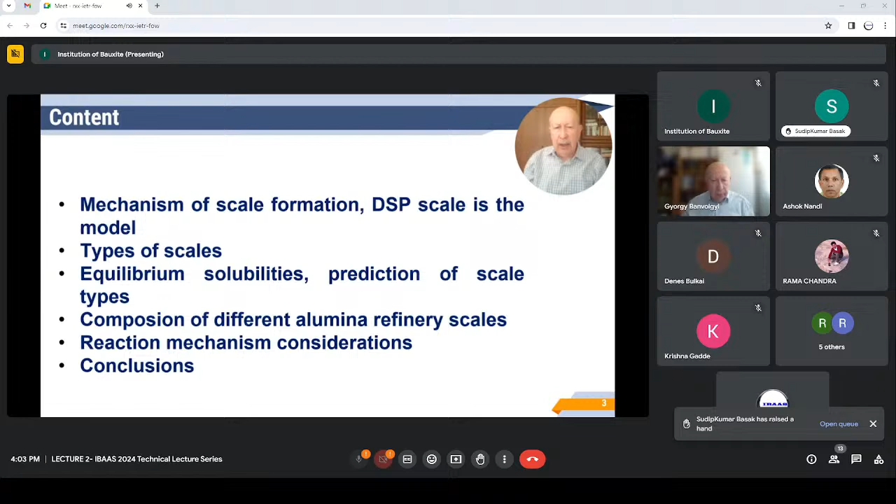As you know, liquids and slurries are processed in the alumina refineries. The liquid phases have complex compositions, so have most of the solid phases, such as bauxites and bauxite residues. The temperatures and solid contents are other characteristics that vary at different places of the Bayer process. The abrasive effects and scalings cause most of the headaches for the operators. The objective of this presentation is to provide an insight to the formation mechanism of various scales of alumina refineries.

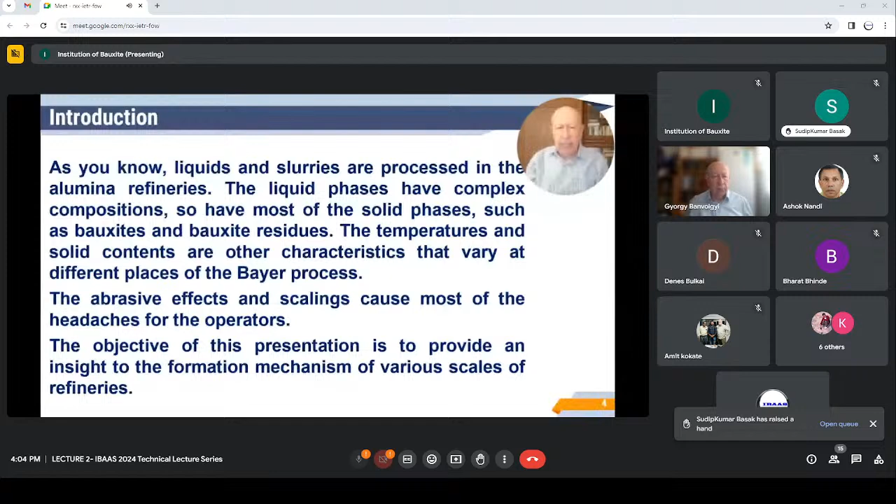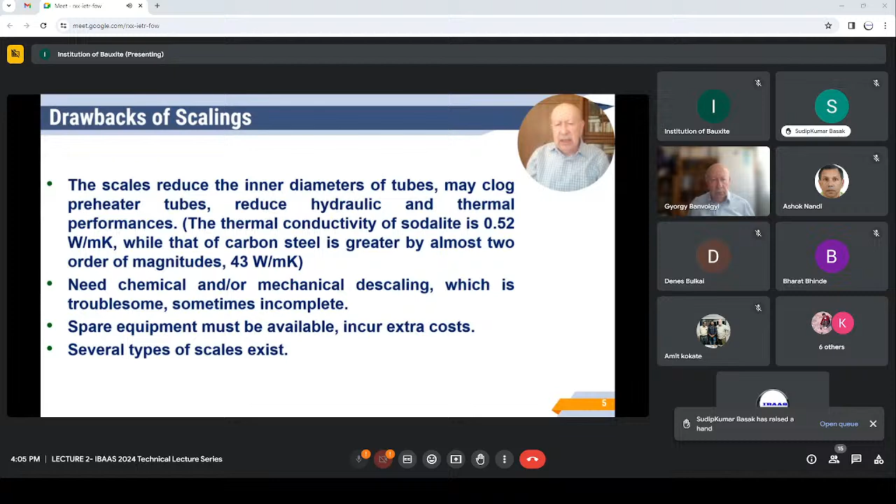The scalings have several drawbacks. The scales reduce the inner diameters of heat exchanger tubes or other tubes, may clog preheater tubes, reduce hydraulic and thermal performances. The thermal conductivity of sodalite is 0.5 watt per meter Kelvin. However, that of carbon steel is greater by almost 2 orders of magnitude. The scales need chemical and/or mechanical descaling, which is troublesome, sometimes incomplete. Spare equipment must be available and they incur extra costs. You will see that several types of scales exist.

Here is a schematic which shows the formation of DSP scale as a model. This is the tube wall. The other part of this tube is actually scale, and here is the thin boundary layer. The saturation temperature of the steam is represented here.

Throughout the tube the temperature decreases, and decreases to a much greater extent through the scale, and there is a difference of the temperature between the boundary layer and the bulk of the fluid. The velocity of the fluid is actually zero at the wall, therefore the residence time of the material is practically infinite. The concentration of silica is at equilibrium by definition at the wall, and in the bulk of the liquid it is significantly higher.

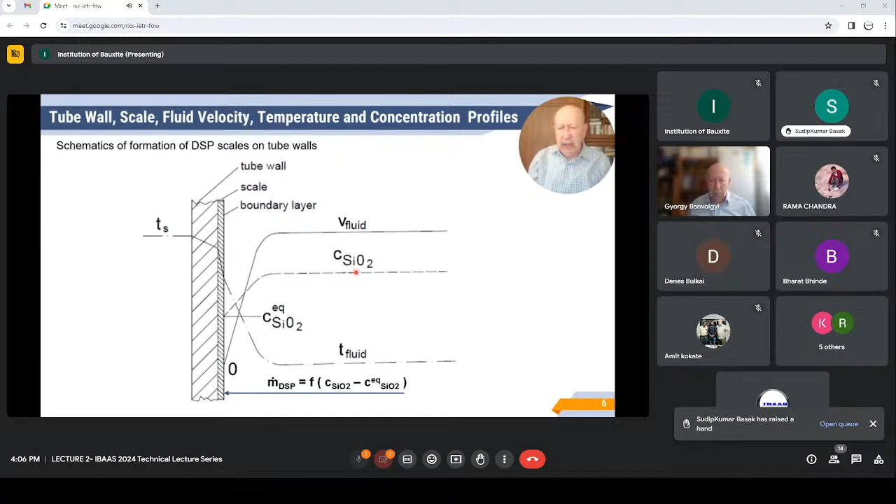The chemical reactions in general can be described if the equilibrium concentrations of the reagents and products, reaction equations, stoichiometry, reaction kinetics, reaction mechanism, and possible transformation of one modification to another one are known. Let us start with reactions of soluble alumina and reactive silica minerals.

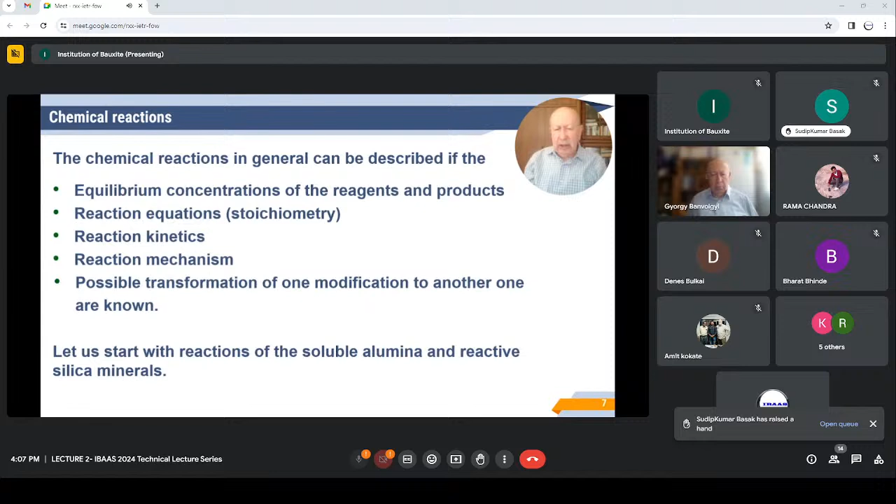Here is the picture of the equilibrium solubilities taken from Jan Kotte paper back to 1981. These lines represent the gibbsite equilibrium solubility at various caustic concentrations. These lines describe the boehmite solubility, and there is some information about the diaspore solubility, all in the function of the temperature.

And here is a Bayer cycle of a low temperature digestion refinery. Actually, it is Bauxilum in Venezuela, South America. And let me emphasize that at this point, the liquid phase is able to dissolve some alumina. However, the liquid phase is supersaturated for boehmite.

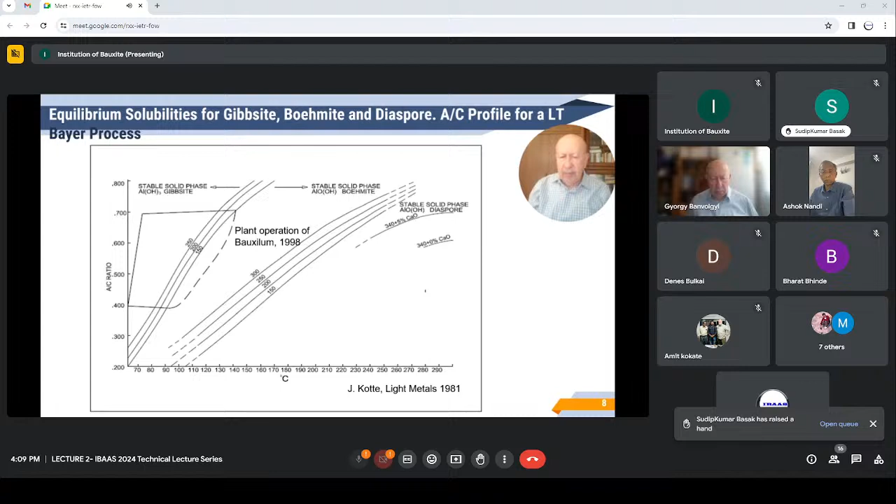This graph is taken also from Jan Kotte, and you can see that the overall reaction rate starts at about 100 degrees centigrade, a little bit at higher temperature. Kaolinite, boehmite starts dissolving at about 160, 180 degrees centigrade, and diaspore somewhere higher than 230 degrees centigrade. And you can see that at a certain point the overall reaction rate slows down and diffusion conditions are met.

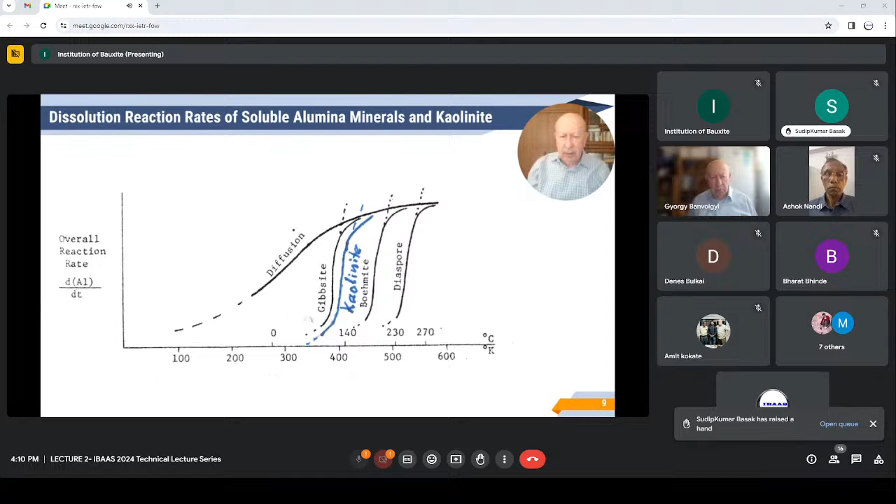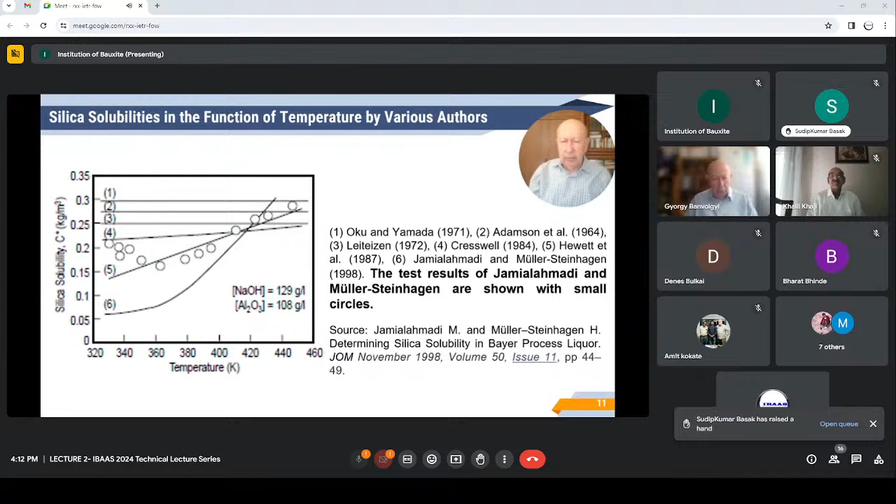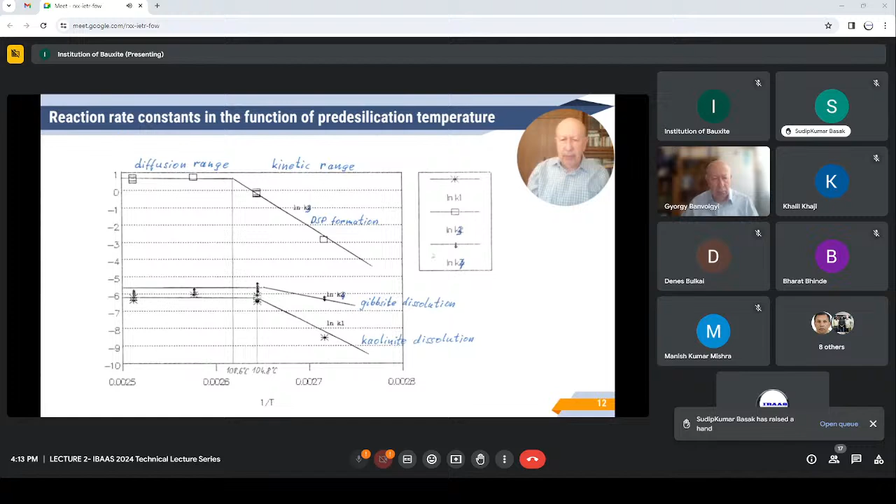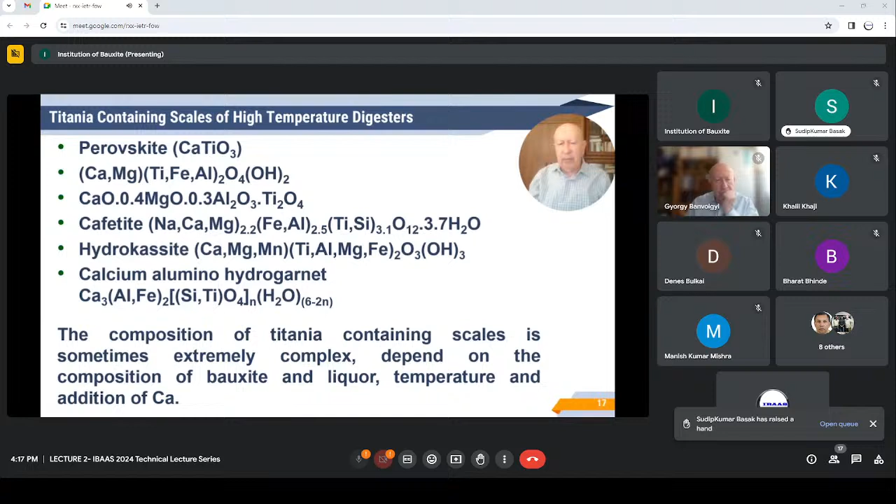Let me go further to the process technology, the feedstocks and scales of some alumina refineries. The investigation of the scales goes back to 1971 when the scales from the Almásfüzitő alumina plant were investigated thoroughly. The bauxite was boehmitic bauxite, however, a fairly large amount of available alumina was in gibbsite, and some were found in goethite. About 40% of the iron oxide was in goethite, the rest in hematite.

Some predesilication was carried out for 6 hours at 90 degrees centigrade. The digestion was so-called single stream digestion. The digester lines consisted of 5 vertical shell and tube heat exchangers heated with flash vapor, 2 autoclaves heated also with flash vapor, and 5 autoclaves heated with live steam, and they provided the retention time of about 1 hour at 225 degrees centigrade.

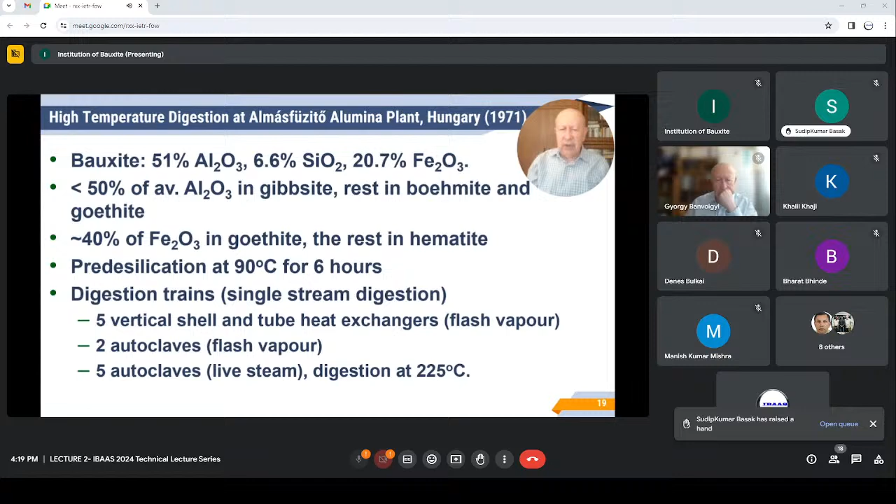Here is the chemical composition of the digester scales. You can see that there was a significant change in the composition of the silica content at about 145 degrees centigrade. The silica almost diminished, and the amount of iron became dominant.

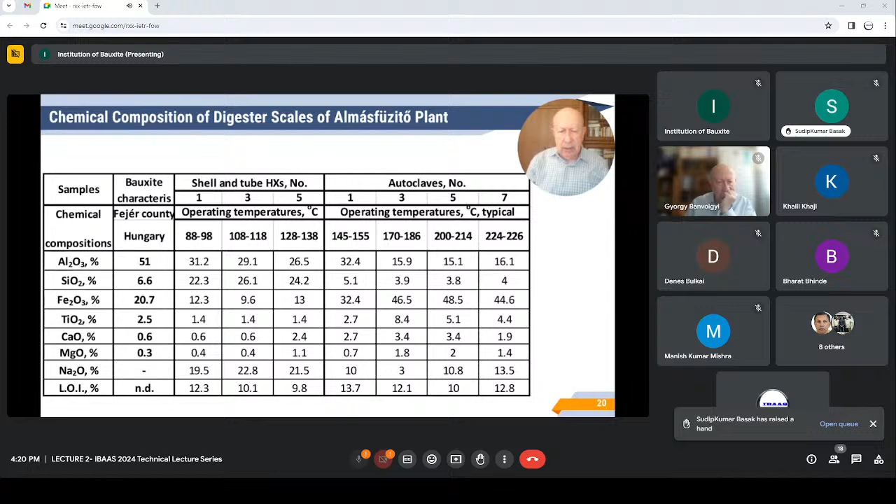The next slide shows the mineralogical composition. I am sorry that this table is populated so much. The sodalite and to a lesser extent cancrinite comprise the main constituents of scales in the preheaters at temperatures up to 140 degrees centigrade. At temperatures higher than about 160 degrees centigrade, cancrinite becomes dominant over sodalite.

The sum of sodalite and cancrinite significantly decreases in the autoclaves operating at 150 degrees centigrade and higher, since the transformation of reactive silica finished. In the autoclaves at temperature of 145-166, boehmite deposits can be found due to the local supersaturation of sodium aluminate for boehmite. At higher temperatures, the liquor becomes unsaturated and dissolves boehmite.

The goethite to hematite transformation starts at about 160 degrees centigrade. The hematite becomes the principal iron constituent of the scale, while goethite content gradually diminishes. The hematite-goethite ratios dramatically increase at temperatures higher than about 180 degrees centigrade. These observations support that the conversion of goethite to hematite takes place via liquid phase.

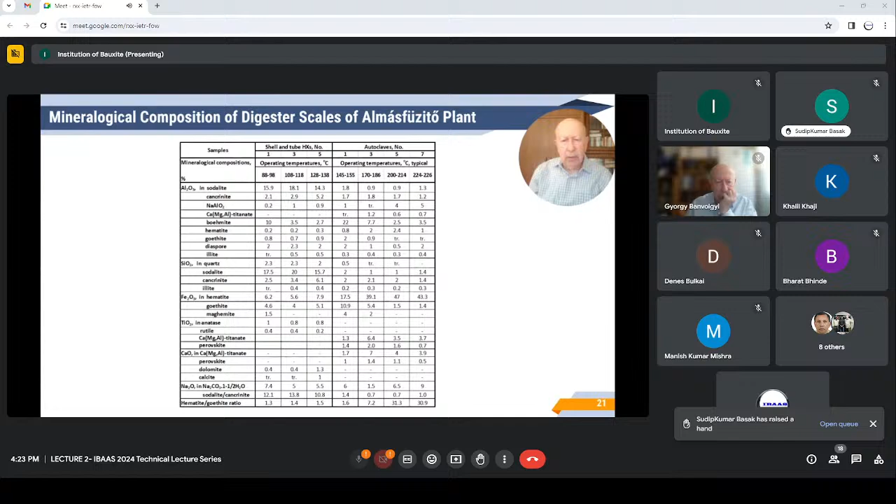The next refinery is the Magyaróvár Alumina plant, Motim, also in Hungary. The bauxite composition is presented on the following sheets. Tube digester comprised the digestion equipment in this plant. This was operated with single stream digestion. 15 horizontal tubular preheater units heated with flash vapor and live steam condensate, then 4 also horizontal tubular preheater units heated with live steam, and another tube for the retention time for about 10 minutes.

And after the 6th preheater unit, 2 vessels were installed to provide 12 minutes retention time at about 145 degrees centigrade, and after the 9th preheater unit, 1 vessel for 6 minutes additional desilication at 180 degrees centigrade. The digestion temperature was 240-250 degrees centigrade.

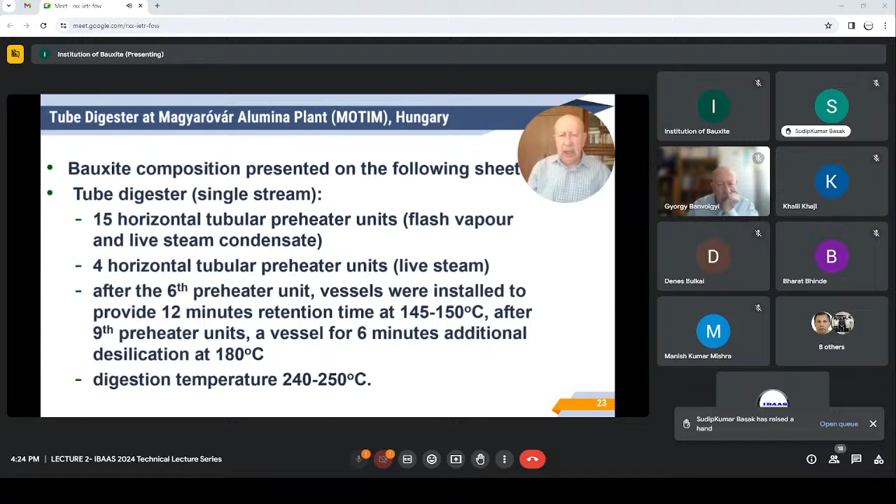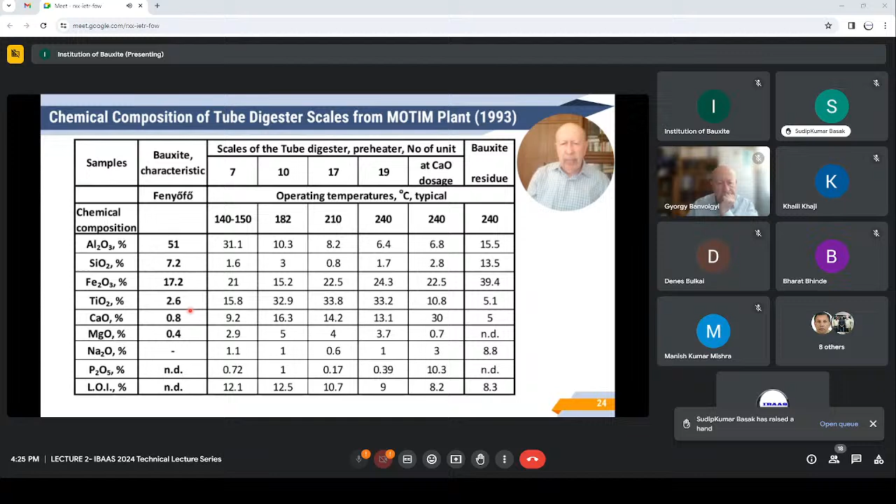Here are the chemical composition. You can see that the titania and calcium containing minerals are characteristic for the scales. The bauxite was a typical high silica bauxite in Hungary. I'm sorry that this table is populated.

Also, sodalite and to a lesser extent cancrinite comprise the main constituents in the tubular slurry heat exchangers at operating temperatures up to about 150 degrees centigrade from previous experience. The vessels, which provided retention time of about 12 minutes at about 145 degrees, significantly reduced the sodalite cancrinite scale in the preheaters operating at higher temperatures to a fraction. A temporary boehmite supersaturation caused boehmite deposition at the temperature of about 145 degrees centigrade.

The calcium-magnesium alumina titanate compound has been found in the largest amount in scales formed at temperatures higher than 164 degrees centigrade. The amount of hematite is significant at 140-150 degrees centigrade and higher temperatures. The goethite is negligible. The hematite-goethite ratio is about 10 times greater than in bauxite. This supports that the goethite-hematite conversion takes place via liquid phase. This is why hematite deposits.

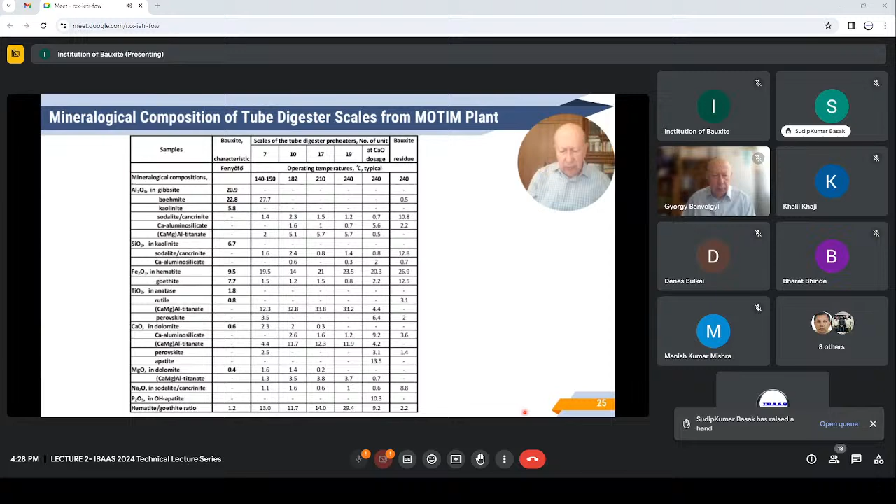The next refinery is the Bauxilum, Venezuela, where gibbsitic bauxite is processed with a digester of typical low temperature digestion of 145 degrees centigrade. The great amount of silica is in quartz. The reactive silica is almost negligible. The predesilication was applied at 98 degrees centigrade for about 10-11 hours.

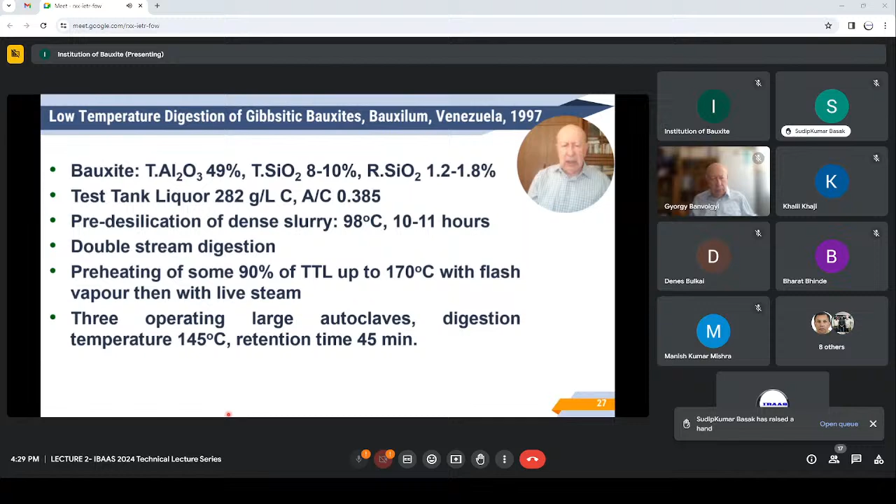A conventional double stream digestion was applied. Some 90% of the spent liquor was preheated with flash vapor, and then finally with live steam up to, as mentioned, 170 degrees centigrade. Here is a picture taken from a 1200 square meter horizontal preheater. You can see that in several cases the scales left the tubes and clogged the tubes.

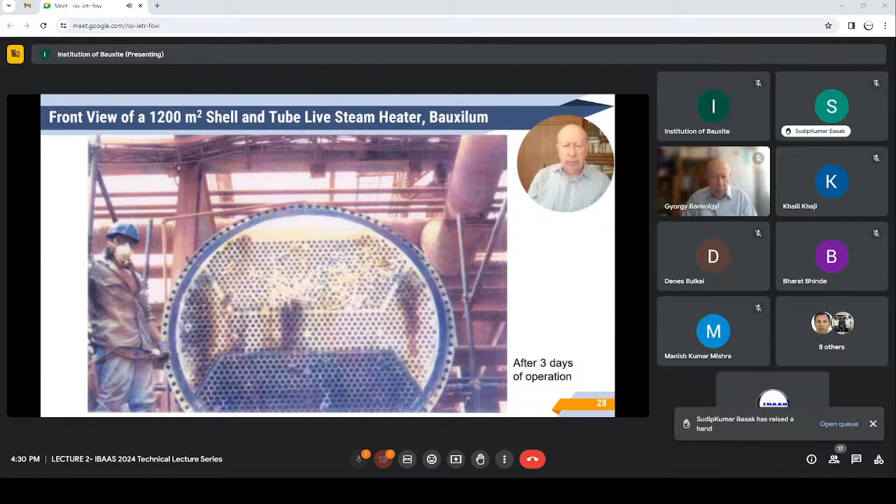Here are pictures of the live steam heater scale. These scales were taken after only 3 days of operation, and this is the front view which was in contact with the spent liquor, and that is the rear view which was in contact with the tube. The thickness of this scale was almost 3 millimeters. Therefore, there was a possibility to slice these scales and take 3 layers of the scales.

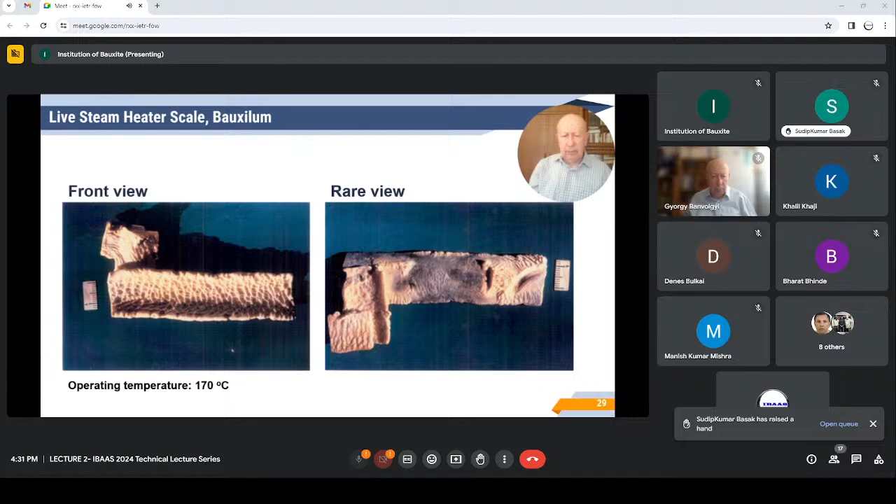Here is the chemical composition of the live steam heater scales, the digester scale, last flash tank and washer overflow pipe scales, and also samples were taken from the bauxite and the bauxite residue as well.

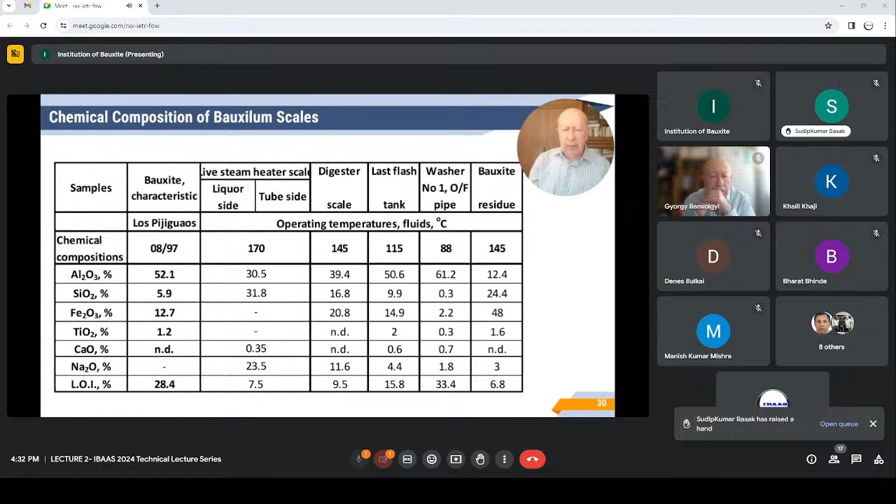As mentioned, the surface of the scale which was in contact with the spent liquor consisted of primarily sodalite. Here you can see the rear side of the scale which was attached to the inner wall of the heating tube, only 3 days old. The amount of cancrinite increased at the expense of sodalite. It obviously formed from sodalite.

The uneven surface of the scale, which was in contact with the spent liquor, looks like ocean waves and suggests turbulent flow. You can see that there is no cancrinite in the bauxite residue, only sodalite.

This also confirms that at the conditions of low temperature digestion, sodalite is the primary mineral that is formed. The scale from the digester autoclave consists of cancrinite and boehmite. Sodalite is missing. This confirms the transformation of sodalite to cancrinite over time, even at the relatively low temperature of the digestion, that is 145 degrees centigrade. Boehmite is formed due to the supersaturation of dissolved alumina for boehmite, as has been mentioned.

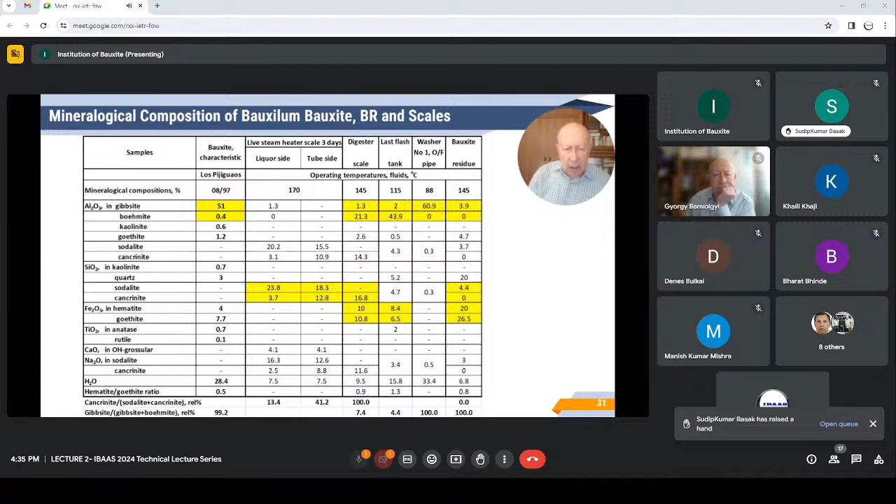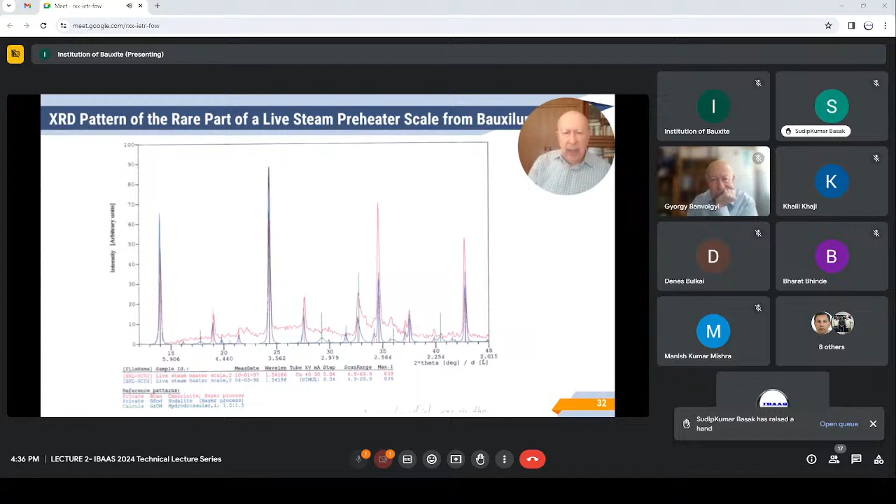Just for your information, here is a pattern of the rear part of the live steam preheater scale. What you have seen, the picture of the rear part, here is the quantitative mineralogy. The XRD pattern was assessed by István Sajó, the well-known expert of quantitative mineralogy.

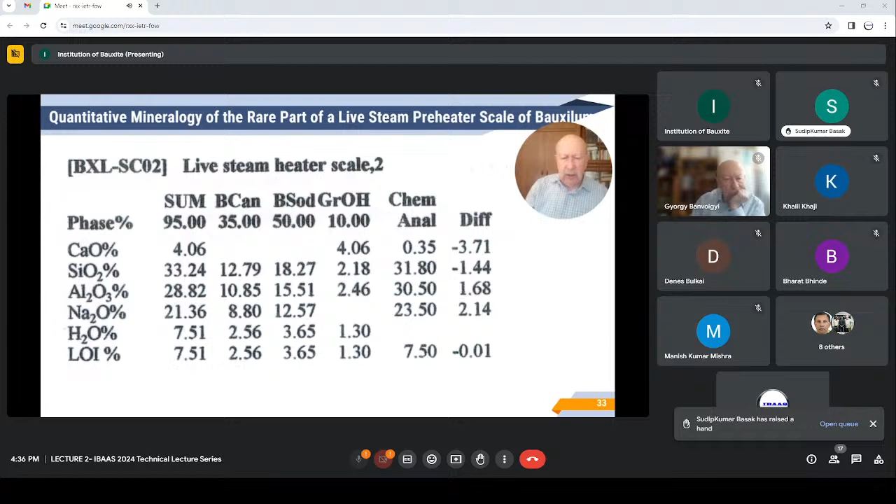The dissolved alumina, sodium aluminate, can react further, and under certain circumstances pseudoboehmite and then boehmite is formed. This is characteristic at about 140, 150 degrees centigrade and some higher temperatures.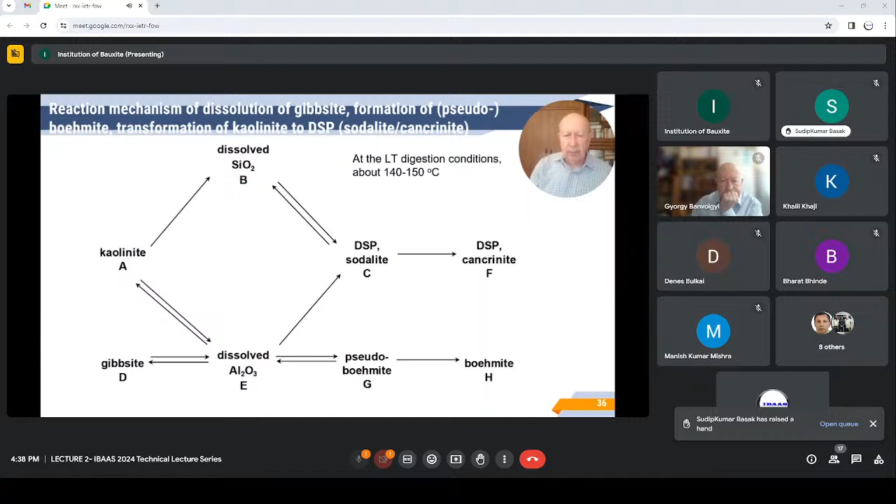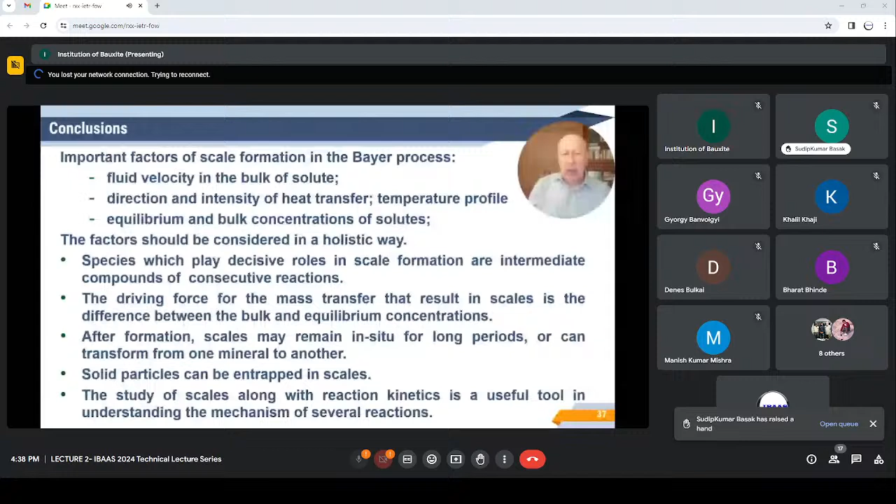The conclusions are the following. The important factors of scale formation in the Bayer process are: the fluid velocity in the bulk of solute, the direction and intensity of heat transfer, temperature; factors should be considered in a complex way. The species which play decisive roles in scale formation are intermediate compounds of consecutive reactions. The driving force for the mass transfer that results in scales is the difference between the bulk and equilibrium concentrations.